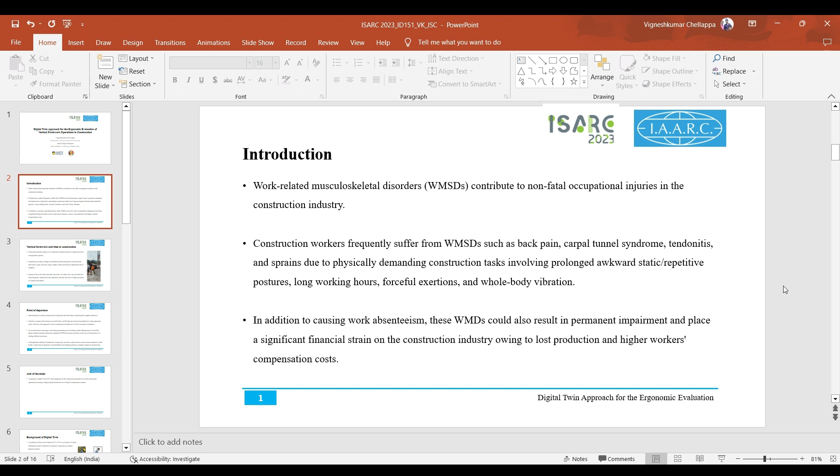And statistics reported that a number of workers worldwide suffer from such disorders in the construction industry, which cause them to lose job site working days. Apart from that, this also results in permanent impairment and places significant financial strains on the construction industry.

So compared to other construction activities, formwork activities require a lot of physical demands and have a high prevalence of ergonomic risks. So carpenters are frequently involved in or associated with formwork activities, and they are often in charge of assembling formwork panels, and they bend their knees and squat during their jobs. So they are at a high level of risk during formwork activities.

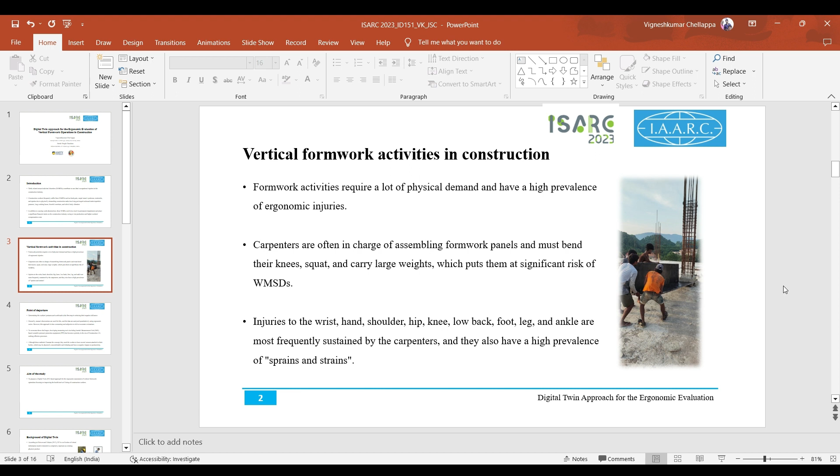So injuries to the wrist, hand, and shoulders are the most frequently sustained by the carpenters, and they have a high prevalence of sprains and strains. So, determining the workers' postures and workload is the first step in reducing their negative influence. Generally, manual observations are used for this. However, such methods are time consuming and subjective to deliver accurate evaluations.

So, to overcome these challenges in the era of construction 4.0, measuring tools such as IMU and other advanced methods have been proposed. However, such methods or techniques have a negative impact on productivity, which could cause discomfort and irritation among the workers due to the sensors that are attached to their bodies.

So for these recently developed advanced tools, they need sensors which have to be attached over the worker's body in order to analyze the risks. So this is quite difficult as they face some of the issues that I have mentioned.

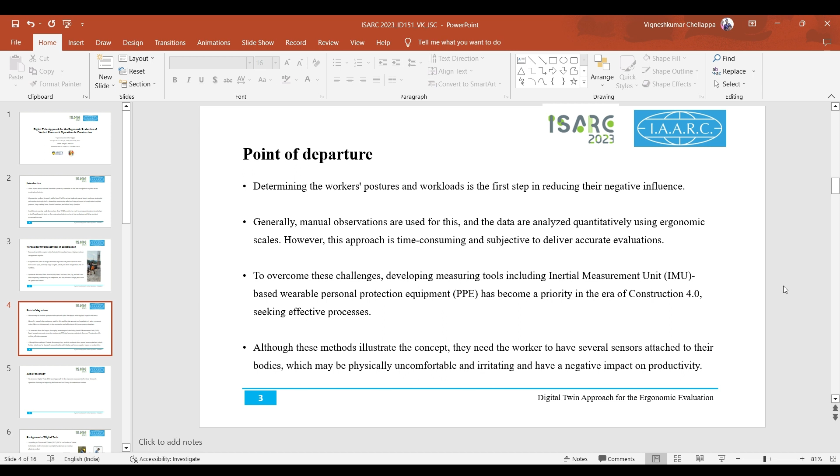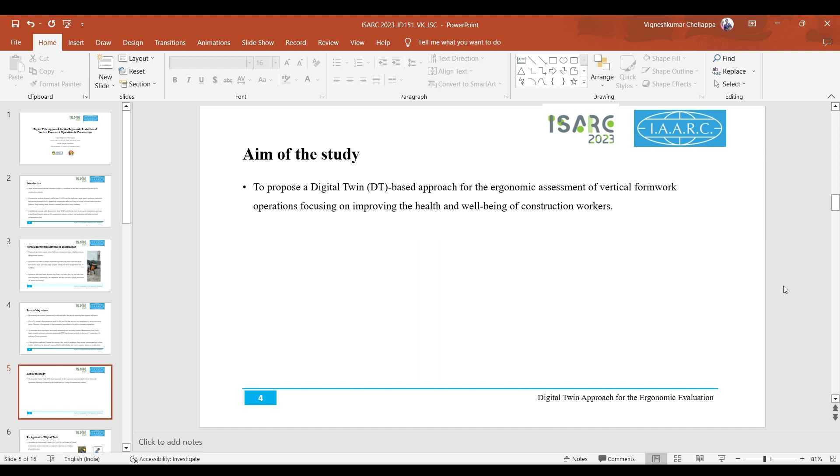So, in this particular study, we proposed a digital twin approach for the ergonomic assessment of vertical formwork operations focused on improving the health and well-being of the construction workers. So, digital twin is a collection of virtual information models which is intended to completely represent an existing physical product. So it is creating a digital replica of a physical object.

And coming to the construction industry as well, such technology has been adopted, but it is very limited when we talk about digital twin for ergonomic risk assessment. So in this study, we proposed this digital twin approach in order to find out the benefits of this particular method.

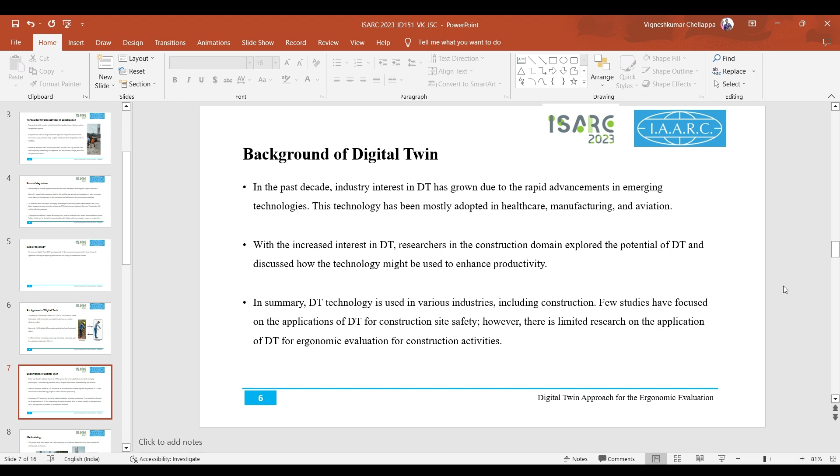So coming to the methodology part, this present study used manual observation and video recording to collect field data. The study was performed on commercial construction projects in northeastern India, and at the time of the study, the workers were involved in vertical formwork operations such as panel assembly and panel erection using steel formwork systems. And the workers' task was to assemble the formwork panels, which we can see on the left hand side.

They are assembling and lifting it to the actual area, and erecting it manually around the rebar, and locking them with bolt and nut, which can be seen in the right hand side image. The workers are erecting formwork panels around the rebar, carrying the entire formwork panel. It weighed around 108 kilograms, and this was gathered from the site supervisors during observation.

And we observed that the workers mostly use their upper body and were involved in repetitive work and awkward postures. So once the manual observations were performed, we used a camera in order to capture the working cycle positions while the workers performed their routine tasks.

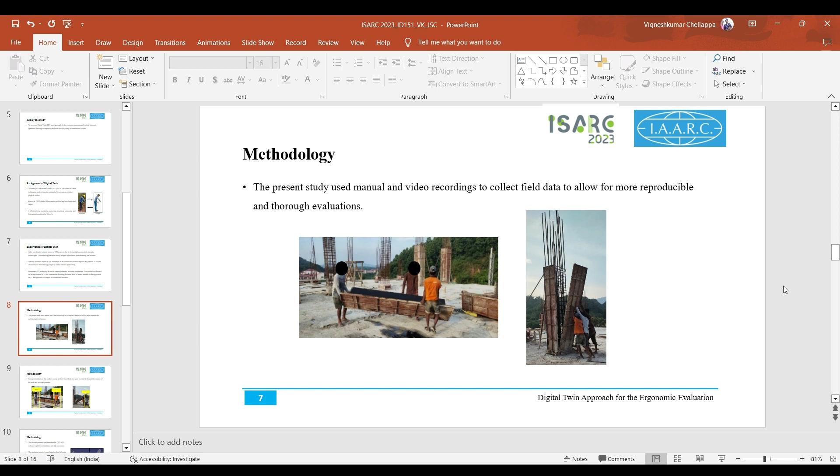Then the recorded videos were transferred to the computer following the observational methods, and we took some selected videos and divided them into different segments to select the significant postures for the analysis. So these are the postures that we have selected, and the reason behind selecting these postures was that the workers were repeatedly using the same postures when lifting the formwork panels throughout their task.

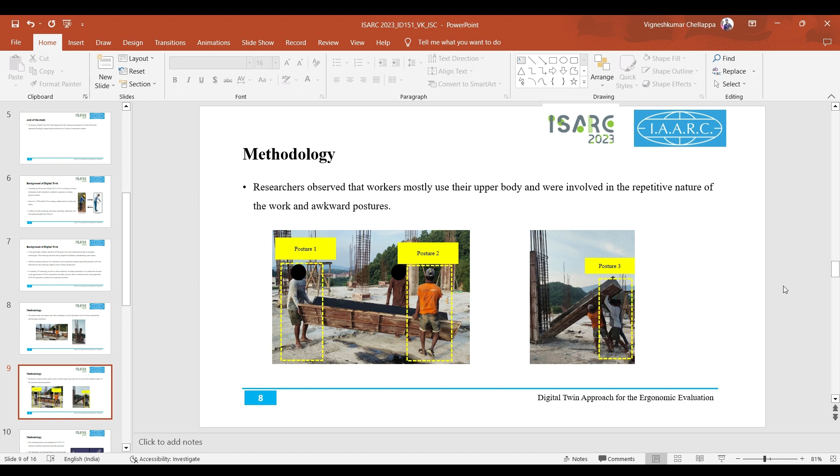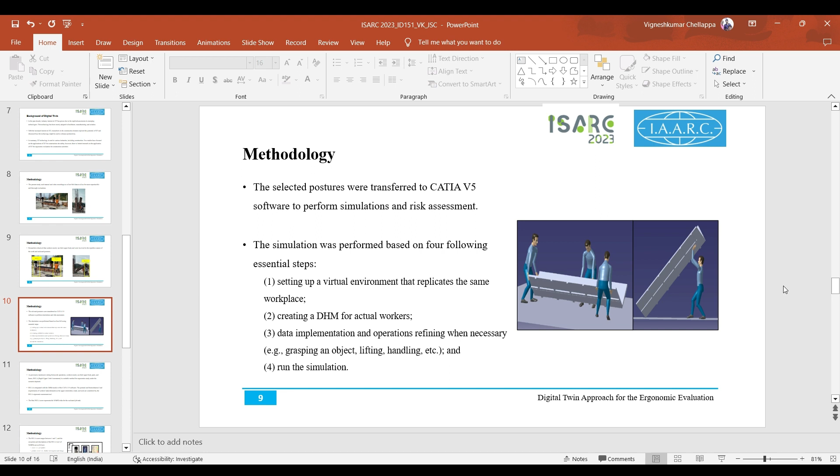So then these postures, once we had selected them, were transferred to the CATIA software to perform simulations and risk assessment. CATIA is a digital human modeling software which replicates the real working environment for the worker's task. The simulation was performed based on the following essential steps: setting up the virtual environment that replicates the same workplace, then creating a DHM for the actual workers, data implementation and refining operations whenever necessary, and finally we run the simulation.

As previously mentioned, during formwork operations workers use their upper body parts, and hence RULA was a suitable method for the ergonomic study. RULA is already integrated with the DHM module, and the postural and biomechanical loads are considered by the RULA ergonomic assessment tool. The final RULA scores also represent the risks for the evaluated job task.

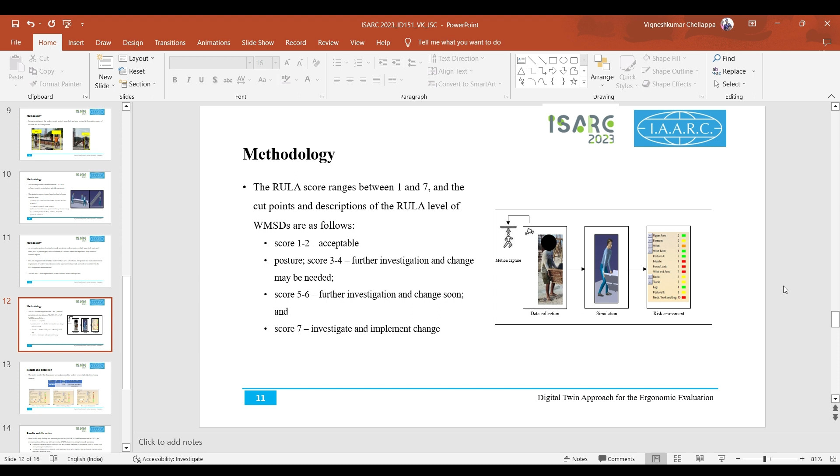The RULA scores range between 1 and 7, and the cut-point levels of RULA are as follows. Scores 1 and 2 are acceptable, 3 to 4 means further investigation and change may be needed, 5 to 6 means further investigation and change soon, and 7 indicates investigate and implement change immediately.

Coming to the results, the studies revealed that the postures were awkward and the workers were at a high risk of developing disorders. All postures one, two, and three have an overall score of 7, a high risk level, and action has to be taken immediately to investigate and change the working postures.

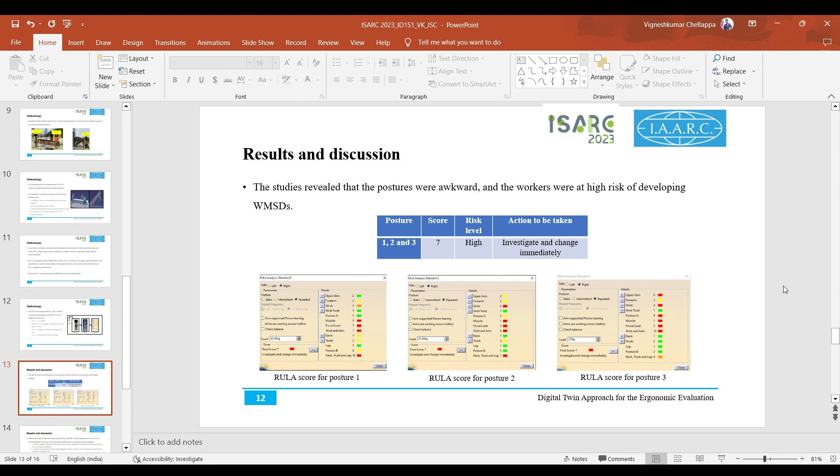Coming to the RULA score for posture 1, it could be seen that the neck, trunk, wrist and arms are at high risk of work disorders. For posture 2, the neck, trunk, and also wrist and arm are the most highly affected body parts. And in posture 3, the wrist and arm are the highly affected body parts. So overall, the trunk, neck, wrist and arm are found to be at high risk of disorders.

Based on the study findings, we recommended some practices from the literature, and we anticipate that such practices could aid in preventing disorders that occur during formwork operations. First, construction organizations should try to minimize lifting and overreaching requirements for their formwork workers by providing lifting devices such as hoists and hand tools. And to reduce disorders, formwork manufacturers should provide handles or grips on formwork components without unnecessarily increasing the weight.

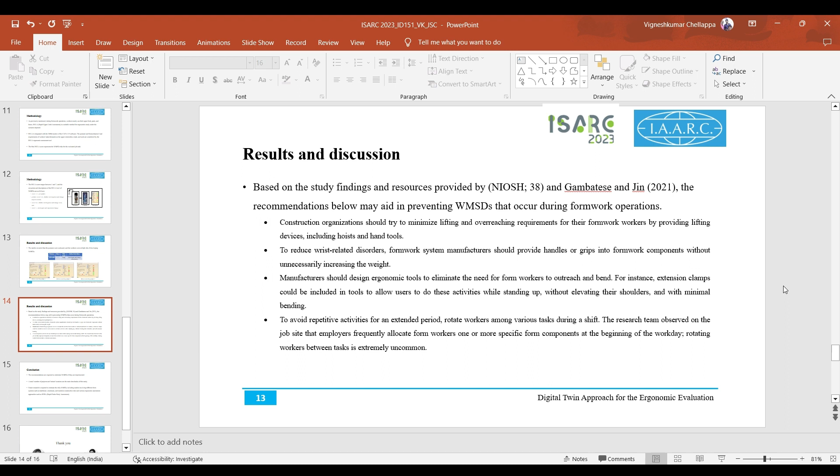Manufacturers should design ergonomic tools to eliminate the need for formwork workers to overreach and bend. For example, extension clamps could be included in the tools to allow users to do these activities standing up and without elevating their shoulders. To avoid repetitive tasks, rotations among the workers should be arranged. The research team also observed on the job site that employers frequently allocate more tasks to formwork workers, which should be avoided. Coming to the conclusions, we believe that the recommendations are expected to minimize the disorders.

Coming to the limitations, only a small number of projects and limited locations were selected, which are among the main drawbacks. Future research is also required to estimate the risks of MSDs, including studies involving different formwork types such as traditional, aluminum, and modular construction sites, and other ergonomic assessment approaches such as REBA, so that the entire body, including the legs, is considered.

So overall we could say that the digital twin approach is the best method to assess ergonomics in construction activities, which also addresses some of the previously mentioned challenges that we discussed.